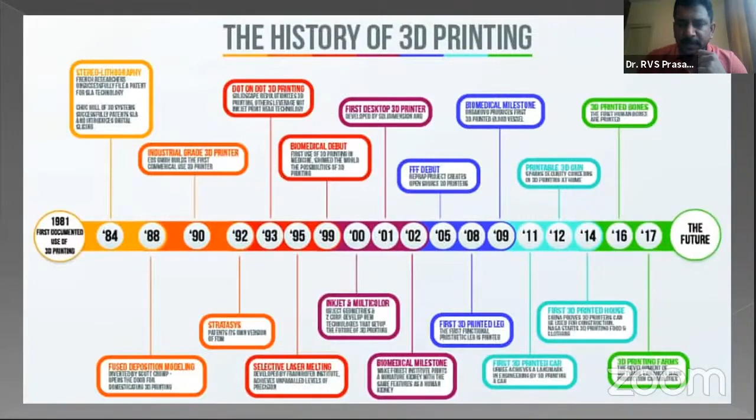So basically this is nothing but a joining process, from the old welding metallurgy. It's nothing but a kind of welding, but you can call it micro welding. It involves making materials and objects from 3-dimensional model data. Usually you give the data in the form of a 3D drawing, and you get the final component in that shape. That's why we call it or term it 3D printing. You can manufacture any component with no limitations with respect to geometry or tools.

It basically uses additive processes. Conventional components can also be modified into different designs - you can eliminate or reduce weight, and redesign and print. That is the flexibility of this process, because in other processes, you have to design intricate shapes and then machine them, and sometimes it's very difficult to machine interior locations that are unable to be reached. However, in this case, you can directly give the 3D drawing so that you can print layer by layer. So you have the flexibility of printing complex components - that is one advantage this process has.

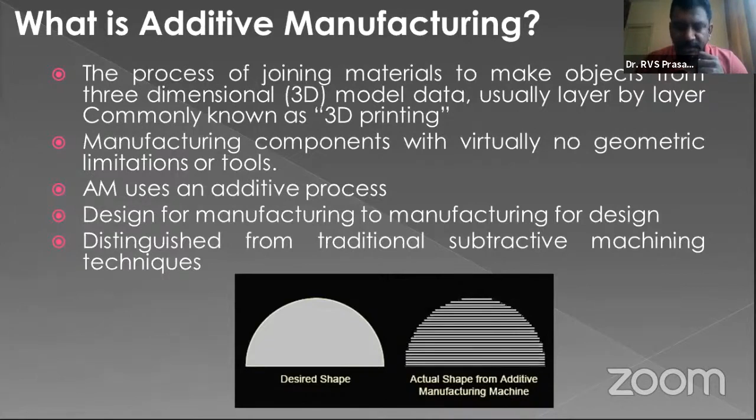Also, most conventional manufacturing processes are subtractive. You have to start with a billet or a bloom initially, and then machine it into different shapes to arrive at the final product, which requires a lot of traditional processing steps. However, in this case, you can directly get the near net shape component by using this particular process. As I mentioned, this functional principle involves basically four different steps.

Basically you have a CAD file, which is required, and then you have to convert it into STL format. This is nothing but making your design into different layers, called slicing, and then feeding that file or programming codes to the machine. You end up with a final 3D part, but the only way you can get the final component is by layer addition.

So basically, the system starts by applying a thin layer of powder material to the building platform, and a powerful laser beam fuses the powder at exactly the points defined by the computer generated component design data. Then the platform is lowered to another layer, powder is applied again, and the material is fused so as to bond with the layer below at the predefined points. The predetermined design is such that the laser beam moves according to the design given by you, and the part is printed and added layer by layer.

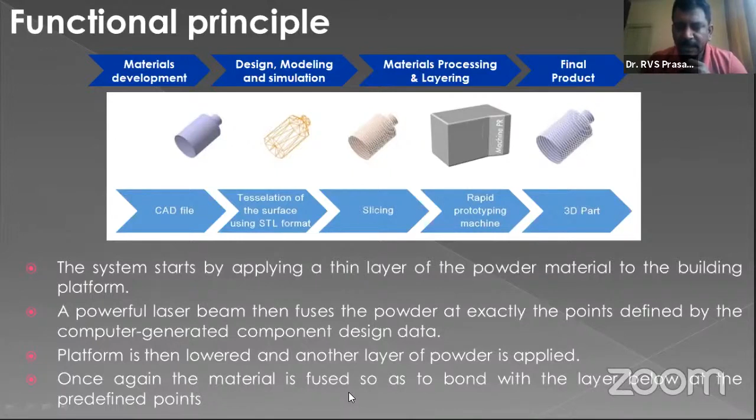This particular process has a lot of freedom in design, it is complexity free, and offers potential elimination of tooling and lightweight design. It eliminates a lot of production steps, unlike conventional manufacturing.

However, this process also has a lot of disadvantages, because it takes a lot of time, with very slow build rates. With current 3D printing machines, some components may need 48 to 72 hours, depending on the volume of your component. At the same time, production costs are high because the input material is in powder form, which is very expensive depending on the material. If you are going for complex materials and alloys like nickel based super alloys or titanium based alloys, the cost will be considerably high.

A lot of effort is also required for application and design, and sometimes it's a discontinuous production process, because 3D printing is mostly a batch type process. You need to get the design, then do slicing and all those things. At the same time, the component size at the moment is limited because it depends on the bed size or the machine size of the AM process.

Unlike foundry or forging, where you can cast huge components, for example in forging processes the machine beds are very huge, in the length and breadth of meters. So for that kind of component, conventional manufacturing still has the upper hand.

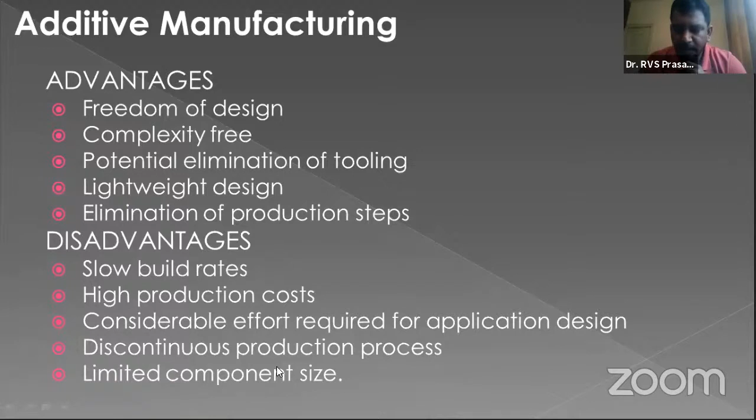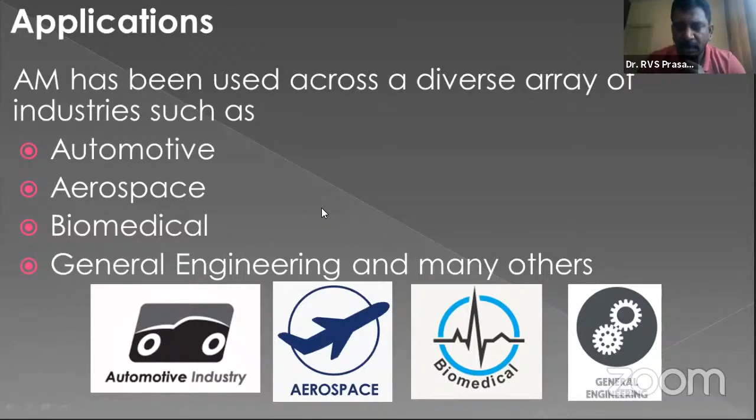When it comes to applications, it is not limited. This process can be used in automotive, aerospace, biomedical, general engineering, and many others, so it has a wide variety of fields in terms of application. Even biomedical has a lot of potential for this field, because you can do implants like bone implants and heart stents. So there are a lot of opportunities and possibilities for this particular technology.

I will be briefing about the most common AM technologies with respect to metallic materials, which is the primary interest for me, as well as DED and other processes which are mostly metal additive.

With respect to metal additive manufacturing, it is divided into powder bed fusion, powder preform fabrication, binder jetting, and sheet metal lamination. These four processes are further classified into selective laser melting, selective electron beam melting, and in DED there is electron beam deposition, that is the wire method, using wire as raw material. Similarly, laser deposition has two varieties: powder and wire method, and in preform fabrication there is plasma wire. So this is with respect to DED.

Then there is binder jetting, which is a kind of powder metallurgy. It's already conventionally available, with a lot of tools manufactured by powder metallurgy. In this process, initially a binder is used to print the 3D component, then it goes for sintering, and you end up with the final shape. And then there is sheet metal lamination.

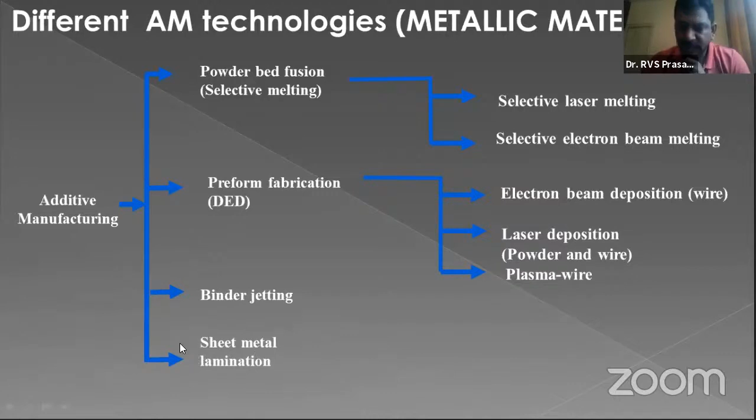So now, as per my agenda of the talk, I will go into more details into direct energy deposition. If you consider process parameters in additive manufacturing, there's direct energy deposition versus laser powder bed fusion. In direct energy deposition: laser power, laser beam spot size, powder or wire feed rate, scanning speed, carrier gas flow rate, and layer dimensions - these are very important. At the same time, for laser powder bed fusion, there's laser power, laser beam spot size, scanning speed/velocity, hatch spacing, and layer thickness. These are some of the important process parameters.

On the right hand side, you have a laser and a scanner, and you can see how the machine functions. You have two pistons simultaneously - one going up and another moving down. In powder bed fusion, once one layer is printed, the RAM moves down so the other side goes up and pushes the powder layer with the help of a powder roller. A layer of powder is formed, then the laser beam comes and melts the required area according to the 3D design given as input. Layer by layer it prints, and you end up with the final component.

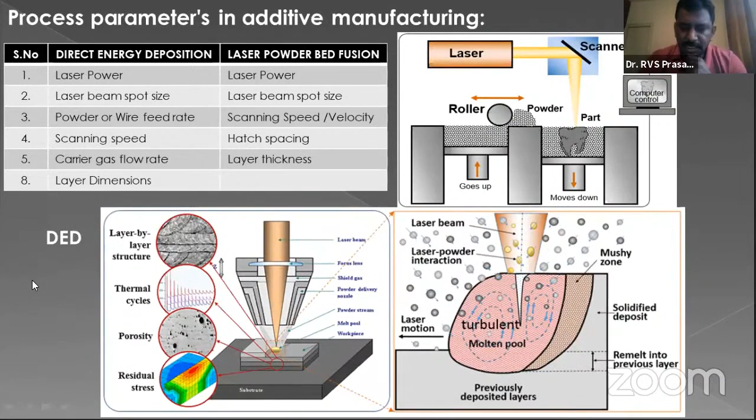In the old process, once a component is deteriorated and cannot be suited for the next interval, they would simply discard it and replace with a new component. However, in the current scenario, with application of these new technologies, one can easily repair it, because you have a 3D drawing of the actual component and know which locations have issues. Those areas can be built up layer by layer and then polished or ground, so you end up with a component that is repaired but looks like new. That is one of the critical advantages of direct energy deposition.

When it comes to the process and microstructure of direct energy deposition, it's very interesting with respect to the metallurgy involved. If you consider this diagram of temperature versus time, you have different layers - for layer one, the peak temperature is initially very high, but it comes down as other layers build up. Similarly, once the second layer comes up, the temperature will be different, and once the third layer comes, there's another peak temperature. So the peak temperatures change as the number of layers you are depositing increases.

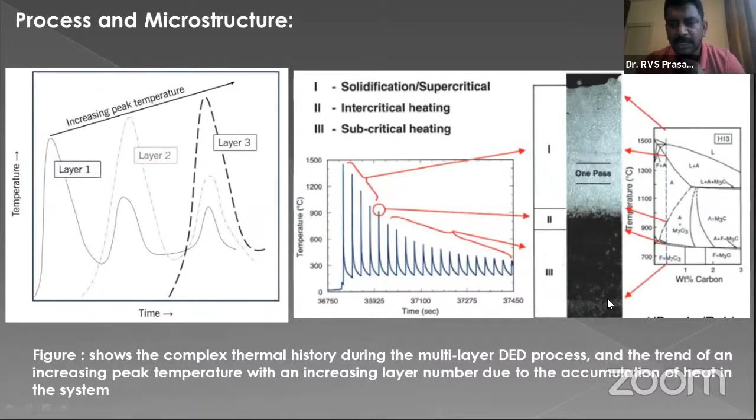It's very important that once you finish this process, heat treatment is a very important aspect with respect to direct energy deposition. Also, in direct energy deposition, the melt pool dynamics are very important - for example, the surface tension and the Marangoni effect, which is very critical.

You consider the dimensionless Marangoni number, determined by M equal to dou gamma by dou T, dou T by dou x, and L square, divided by eta alpha. Where a lot of things come into picture, which are very critical for this particular DED. Gamma is the surface tension, dou T by dou x is the temperature gradient, alpha is the thermal diffusivity, L is the characteristic length, and eta is the viscosity of the melt pool. So all these physical properties will determine your melt pool dynamics.

For example, if you consider your surface tension gradient is negative, then you will be having a melt pool which is wider, as shown in the figure. Similarly, the melt pool geometry will change when the surface tension gradient becomes positive. As shown in the next figure B, when it is positive, the melt pool shape and dynamics will change.

Similarly, when you have positive and negative, initially it will be positive and then becomes negative, then the melt pool will be very turbulent and a different kind of pool will form. So in direct energy deposition, a lot of other forces also play a role, like aerodynamic drag, buoyancy, electromagnetic and Lorentz forces, which may also influence your melt pool dynamics. So that is with respect to melt pool.

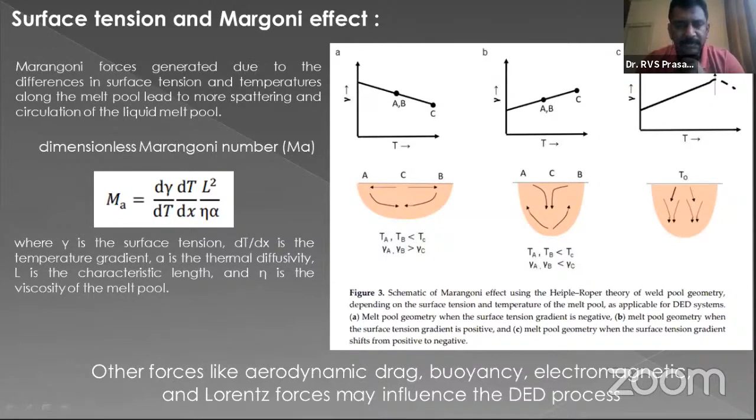Dilution is also a very important factor in case of direct energy deposition, because when you are depositing layer by layer, if you do not have very good dilution, then bonding between the two layers is not at all possible. For example, consider this equation: D is equal to d by H plus d, where H is the melt pool height, and d is the depth of the melt pool which goes into the previous layer.

Usually people consider 10 to 30% dilution is required for proper bonding between the two layers. At the same time, too much dilution is also not good. So one has to optimize a 10% to 30% dilution, which is very important and required for proper bonding between the two layers. This is also a very important factor when considering direct energy deposition.

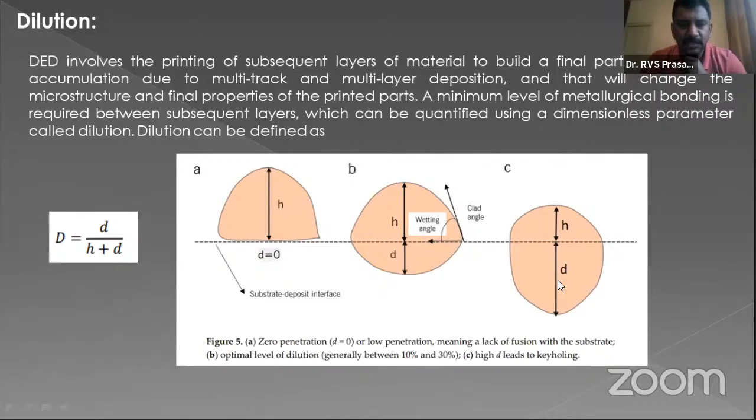Processing maps are very important, because when you go for direct energy deposition, there are two important factors which decide the type of defects or phenomena happening in your material. For example, the linear heat input, which is laser power divided by the scanning speed of the laser, and the powder feed rate, which is the total mass of the powder over the time T to deposit the powders. When you plot laser linear heat input versus powder feed rate, you get a processing map for this particular direct energy deposition.

When you have very high laser input with very low powder feed rate, you end up with a keyholing kind of phenomenon, which is also a defect. At the same time, when you have very high powder feed rate and low heat input, you end up with lack of fusion. You will also end up with a mid porosity zone where the linear heat input is very high at an optimum powder feed rate.

However, if you consider different materials, you can see different colors in the map for different materials. You will not have a single point, but a range of area where you get a better DED or good dilution without any defects. For example, if you consider Inconel 718 alloy in this blue region, you have a large window for this particular alloy. So you have to choose this particular window with respect to process parameters, but also get samples from this window tested for all mechanical properties, and arrive at the best point in this window where you get the best properties.

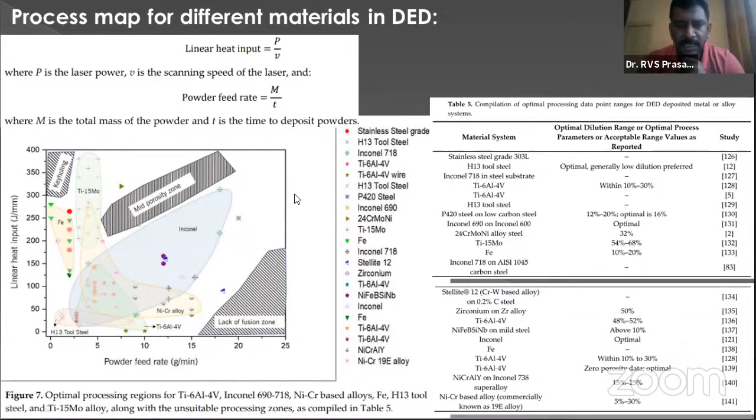So now I've completed more detail into DED. I will now touch upon different materials required for 3D printing, particularly focusing mostly on metals and alloys. There are different materials like steels, in which there's also maraging steel, 17-4PH, and super alloys, titanium based alloys, and aluminum magnesium alloys. These are the typical alloys used for metals.

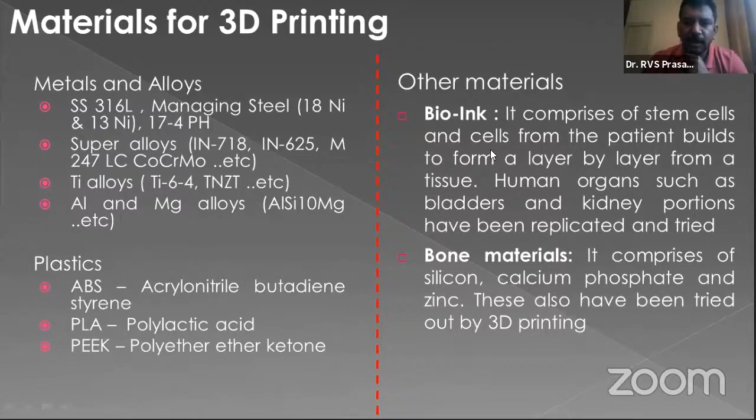And then for plastics, there are different materials, and other materials like biological and bone applications such as bio ink and bone materials. I will be touching upon alloy selection and design for this particular additive manufacturing process.

When you come to materials selection, the important aspect is the free energy versus temperature diagram. You can see the free energy versus temperature diagram where liquid and solid will differ. Once the free energy of a particular phase becomes lower, at higher temperatures the liquid will be stable, while the solid will be stable at lower temperatures, from this particular free energy temperature diagram.

This is a very important aspect because when considering a new alloy or new material, the melting point varies with respect to different materials. For example, aluminum has a melting point around 650 degrees, while other alloys like steels will be at very high temperatures, like 1500 degrees and above. When considering melting point, these aspects come into your laser beam density calculations, laser power calculations, and your scan velocity.

Not only that, there are other physical properties like high reflectivity, high thermal conductivity, and melting point to consider. For example, if you consider aluminum, there is an oxide layer formation on the surface, like Al2O3, which forms on the aluminum. So all these things should be considered when choosing a new alloy.

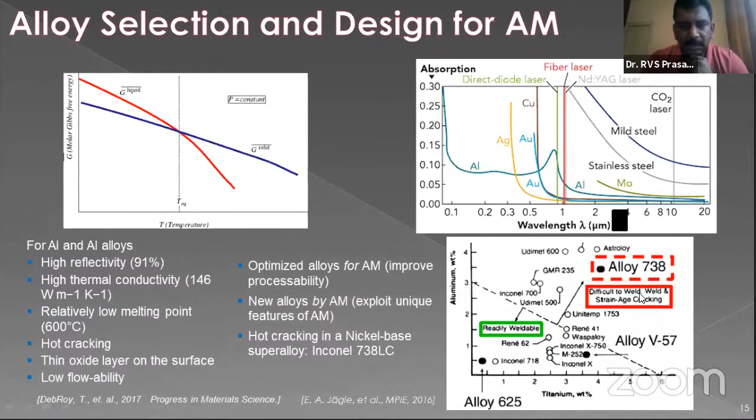So in a way, this kind of alloy diagram and processing map gives a clear picture of how to select an alloy for these 3D printing processes.

When it comes to defects in this field, there are a lot of challenges like porosity, which is very common in 3D printing, because there are two different types of porosities. One is process induced porosity, which occurs during the process or melting, and then there is powder induced porosity, like when the input material powder itself may have porosity during the atomization process. So these two porosities are different.

So the selection of powder and characterization of powder is very critical before feeding the powder into the 3D printing machine. Initial qualification and certification of the powder is a very important aspect, at the same time as process induced porosity.

So as I mentioned, you have a lot of unmelted powders, and like in the previous talk Prasant clearly mentioned, if you have satellite particles on your metallic particles, it may leave as it is and you are unable to melt those very fine powder particles. So those kind of possibilities are also there.

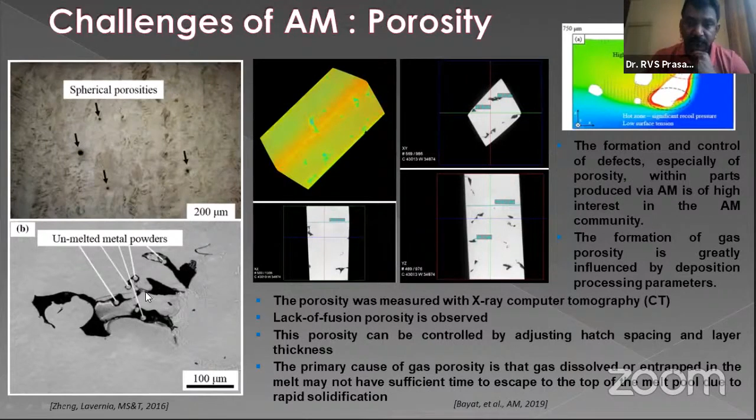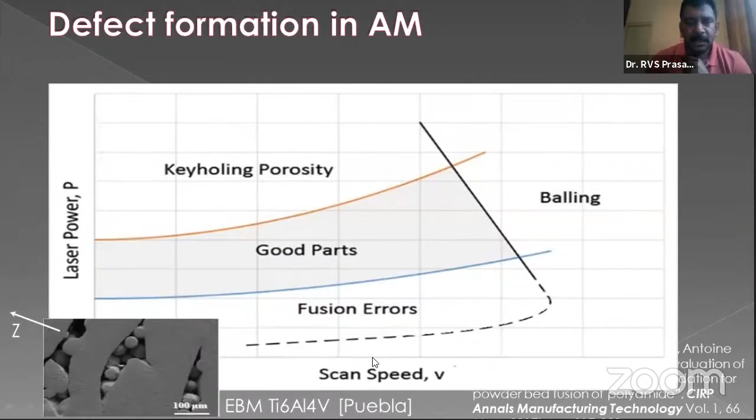If you consider this particular diagram, laser power versus scan speed, this is a very important diagram to arrive at good functional parts. Here you can see three different zones.

When you have scan speed versus laser power, when the power is very low and at lower scan speeds, you will end up with a lot of defects like unfused particles or unmelted zones. At the same time, if you have significant laser power but a very low scan speed, you will end up with gas porosities because of the rapid solidification nature of this process, which has very high cooling rates. Because of that, gases generate, and when they try to escape from your liquid pool, they may get trapped in between, and you end up with gaseous porosity.

At the same time, when you have a very high laser power and scan speed, there is a phenomena called balling. That means it will just simply push the powder without proper melting, so you end up with a balling kind of phenomena.

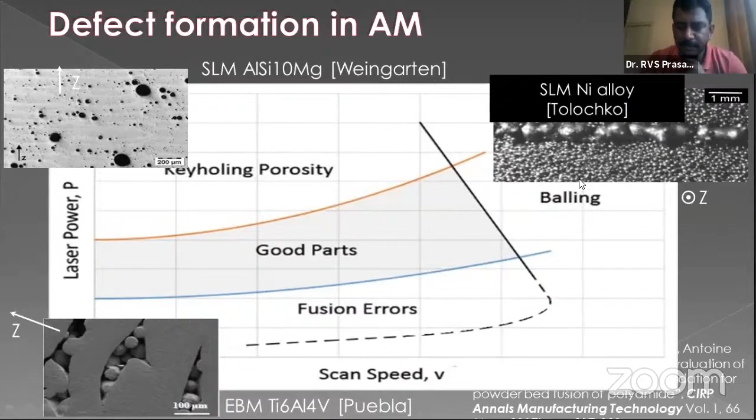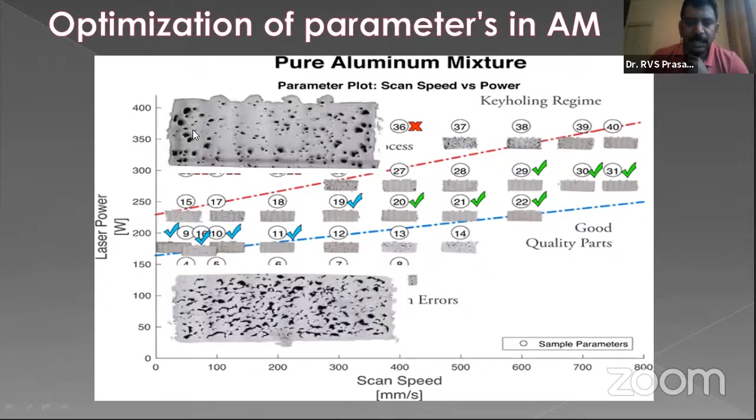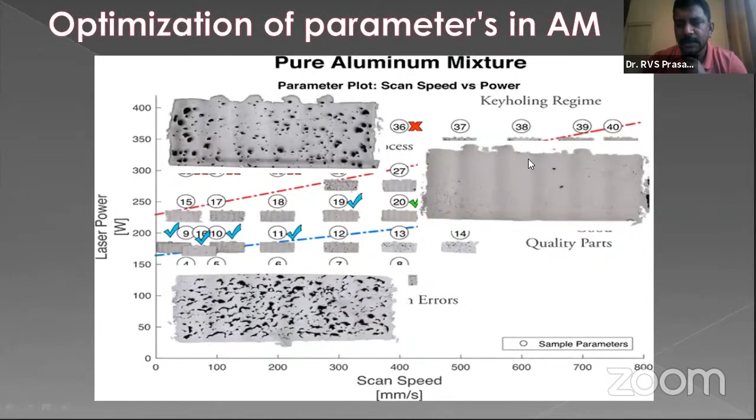So this experiment is in case of the pure aluminum mixture. You can see clearly these are the fusion errors in this zone, and you have a lot of porosity in this particular zone. However, you can see in this particular zone, you get better quality parts.

These residual stresses also create a problem, because if you are not relieving the residual stresses and using the component for final application, it may generate cracks or lead to premature failure of the component. That's why residual stress determination is very important. Usually after 3D printing, people will go for an annealing heat treatment, where all the residual stresses will be eliminated or reduced, and then the component can be dispatched for the actual application.

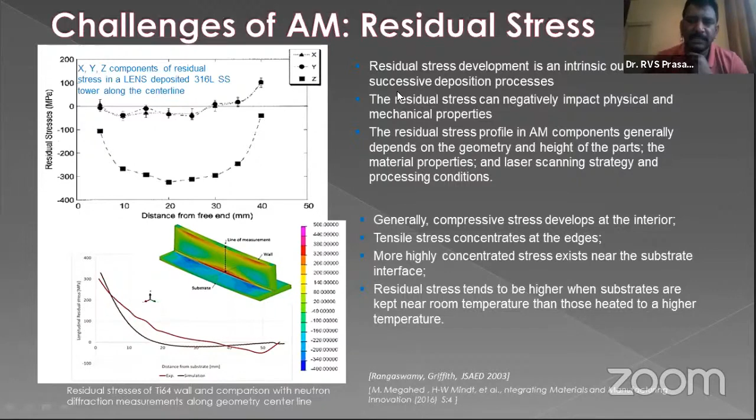More importantly, because aerospace related components and applications require fatigue and creep properties, the fatigue and creep performance in AM parts has still not achieved the conventional level of fatigue life or creep life, because obviously these parts have porosity which becomes the problem for fatigue and creep properties for aerospace applications.

And toughness is also less tough, so people are trying to increase the ductility or reduce the porosity. People are going for hot isostatic pressing, where you can eliminate or completely remove the porosity from your component, and then it becomes as solid as any conventional component.

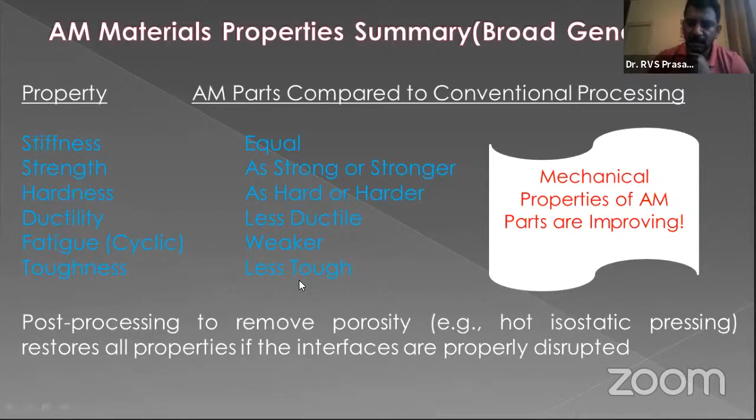So these are some of the key issues, and technical challenges like extremely localized temperature gradients and fast moving heat source, because the laser beam moves at very high speed in case of 3D printing. That will have a lot of implications when it comes to actual application or properties. And dynamic gas-solid-liquid interactions, fast heat, mass, and phase transformations, and laser radiation environments associated with this particular processing -- a lot of things need to be improved in this direction.

And dynamic localized directional solidification, because the heat extraction rate is very high. So you have a possibility of directional solidification, where the solidification, like columnar and equiaxed -- mostly columnar or columnar dendritic kind of structures are going to happen in this environment. However, this can be eliminated by heat treatment, you can make it more uniform.

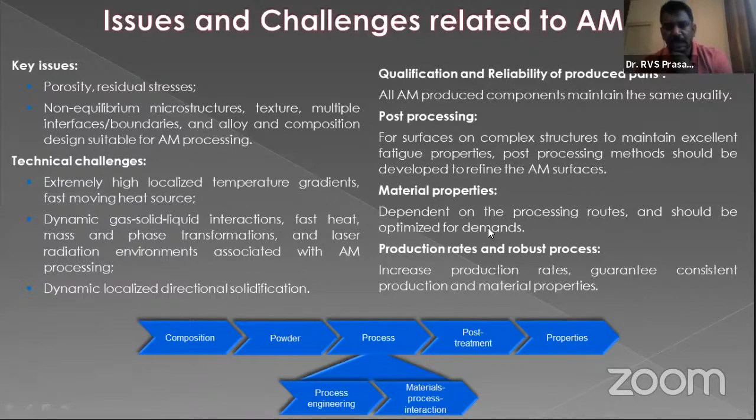Like a quadra laser, 4 times. Earlier there was a single laser. Now with 4 lasers you can build a component 4 times faster. For example, if you are taking 4 hours, you can build the same component in 1 hour by using a quadra laser. So those kinds of improvements are happening. With this, I would like to end my talk.